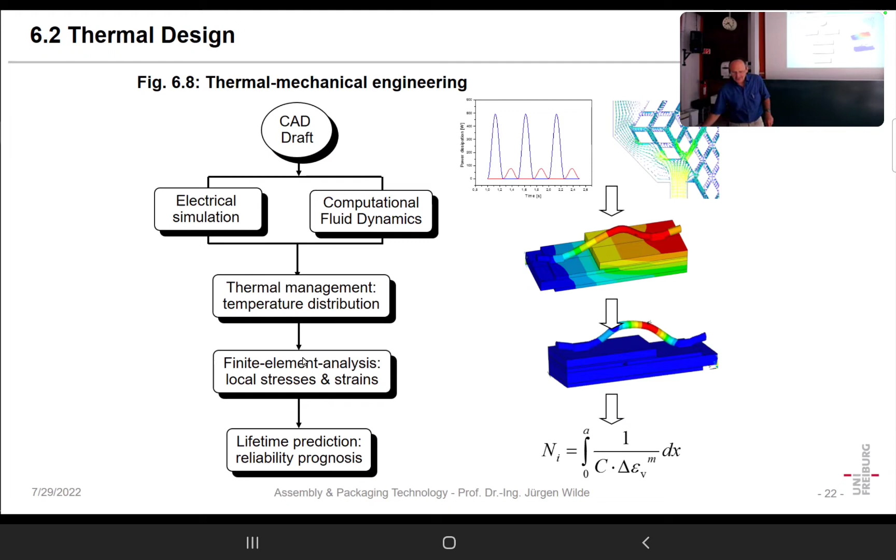Later on, we also developed, let's say, a model for reliability of that thing, but I must say that is not yet finished. We are still doing some research in that field of reliability. Okay, so that's the point.

But in many cases, especially if you do not have so advanced tools like finite element or computational fluid dynamics, you can try with an easier method. One of the methods is just the idea of thermal resistance. Thermal resistance defines how many degrees the temperature rises at the hottest point in a device when you dissipate 1 watt in that device.

And of course, that depends on the design. It also depends on the material. If you have more copper in it or more aluminum nitride or what else, what's the best material with respect to heat dissipation?

Diamond. Diamond can be 5 times better than even silver or copper is. So that's really good. And at the same time, it's an insulator. But of course, making substrates of diamond would be a little too expensive, so diamond is rarely used.

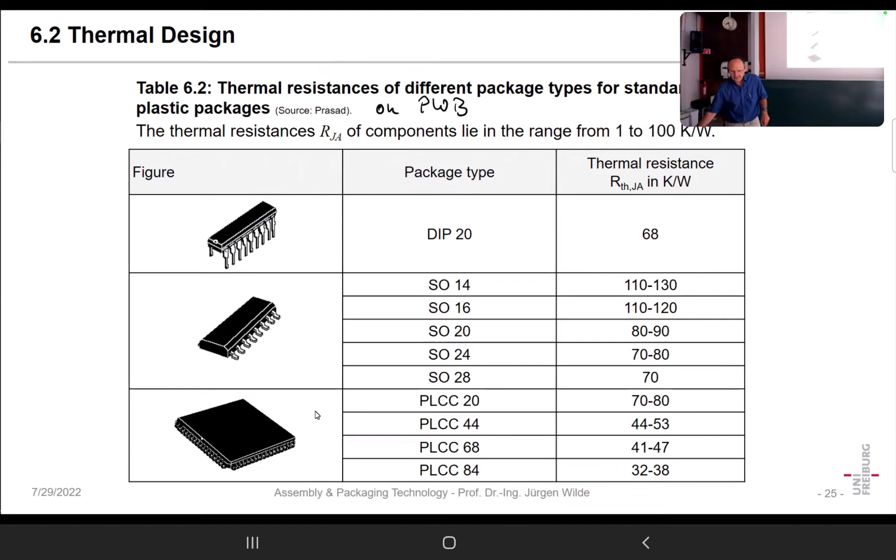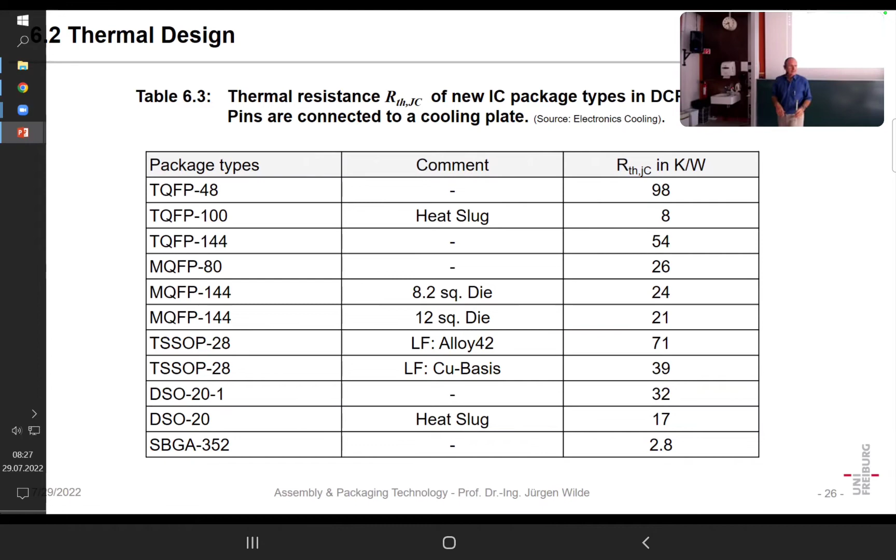In other cases, especially in designs which are made for higher power, and when we want to disregard the effect of the surrounding, then we give RTH junction to case. So that's defining more the thermal resistance inside the package, and not, as in junction to ambient, the overall thermal resistance from inside to environment. Okay, so that is important.

We have also seen from that example that two phenomena are very important for low thermal resistance. One is the material. Of course, the better the thermal conductivity of the material of the housing, the lower the temperature and the lower the thermal resistance will be. On the other hand, if we have air cooling, the faster we blow, the lower will be the temperature and the thermal resistance.

But of course, both resistances, junction to case and case to ambient, are in series. And even if we bring that case to ambient resistance to 0, the junction to case resistance would remain. It's not even that simple - both resistances in reality are not really independent. In fact, we find that when we reduce the case to ambient resistance, then typically the junction to case will increase.

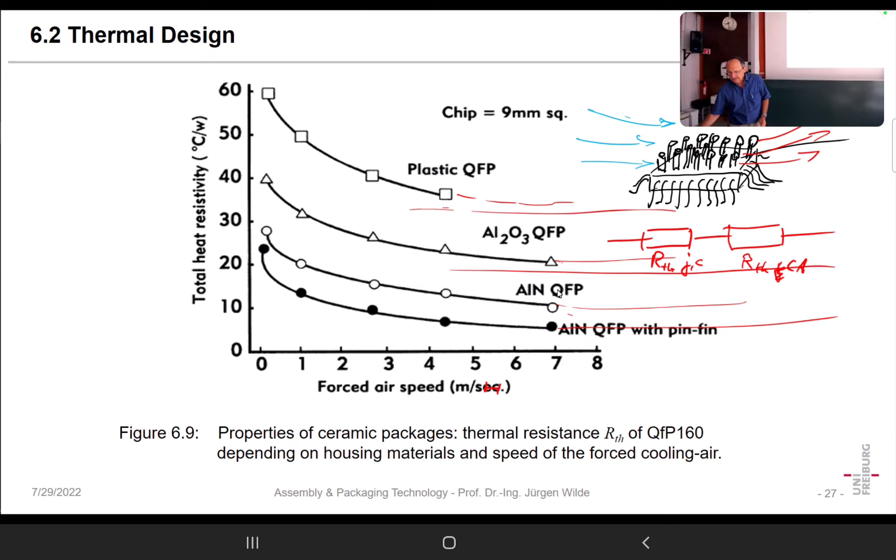Then the question was about heat transfer mechanisms. The first mechanism is just heat conduction. Here we have the so-called Fourier equation, which says the heat flux, which is the power going through a certain area, is proportional to minus the heat conductivity multiplied with the gradient of temperature.

In that way, at least for such a brick-like element, we can compute first of all the heat flow, but later on we also have to compute the thermal resistance. And on the other hand, the heat flow, when we have cooling against the wall, we define a heat transfer coefficient, which is the heat per area and per temperature difference between the medium and the hot material or the hot plate, for instance.

Typical values are between 1 and 10 for free convection of air. Free convection means we do not blow artificially, but it's just... why do we have free convection? What's the reason?

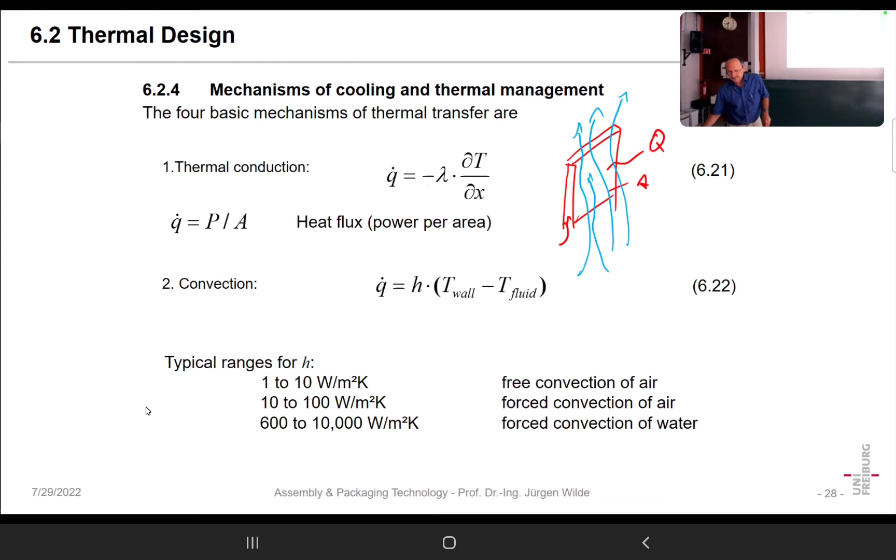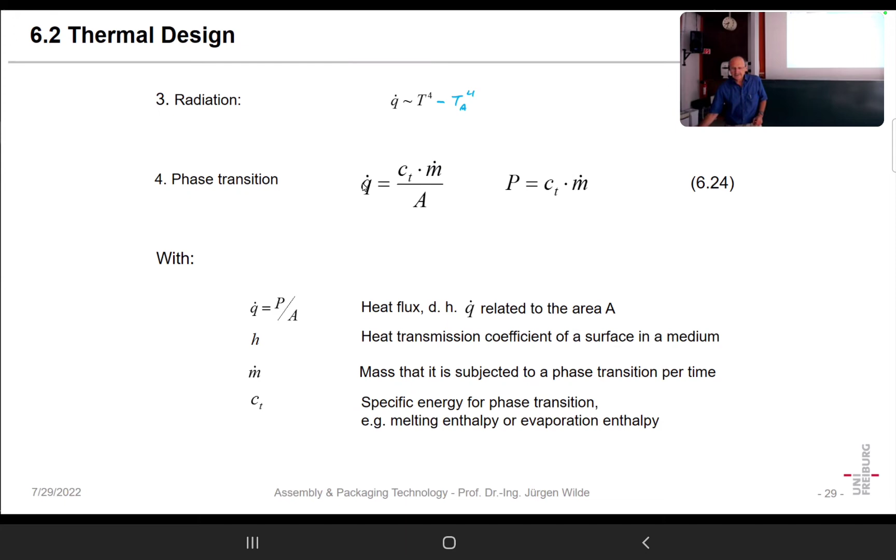Then we have radiation. The heat flux is proportional to the temperature to the power of 4 of the heated part that radiates. But we could say maybe up to 150 degrees centigrade or so, radiation is not really important for cooling - but it is important, we will see it. And then we can have phase transition like boiling, for instance, that is inside a heat pipe.

For thermal conduction, we can say we have derived that if we have such an element, the thermal resistance is proportional to the length in the direction of the heat flow, divided by the area, and divided by the heat conductivity.

And that means, of course, larger areas are better, but one of the severe problems is that heat is always dissipated first in a very small volume, and in that way it must be distributed from a small volume to a large volume. Only when it's in a large volume do we also have a large area from which it flows.

That means to come to a large area, when we have a point source, we also need to have a large distance. And that's the reason why concentrated heat sources are always making problems - because you first have to distribute the heat until you can spread it efficiently. For such point-wise sources or sources in small volumes, you also need materials with high heat conductivity.

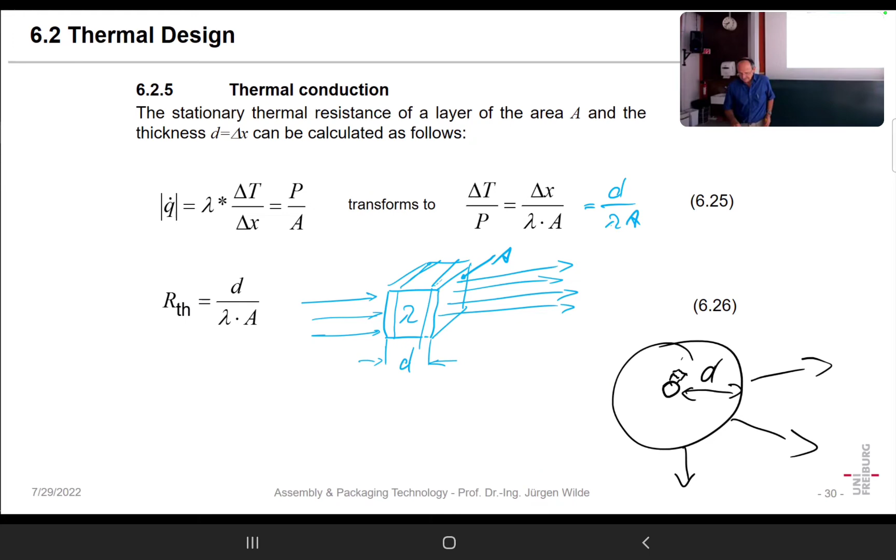We also must keep in mind the temperature conductivity. The heat conductivity is not related to the mass, but it's related to the volume. On the other hand, the Cp, which is the heat capacity of the material, is typically related to the mass. So when we also take into account heat capacity, we also must know the density of that material, meaning how many kilos we have per liter or cubic decimeter of that material.

As I pointed out, we have quite a range. Tin and lead are in the range of 30 to 60, and again here we find a large scatter of the values in literature. A typical value, I would assume also for the exam, is something like 50.

Silver goes to 400, but that is not for sintered silver. Sintered silver is worse because it's not completely sintered, and for that purpose it's lower, somewhere between 200 and 400.

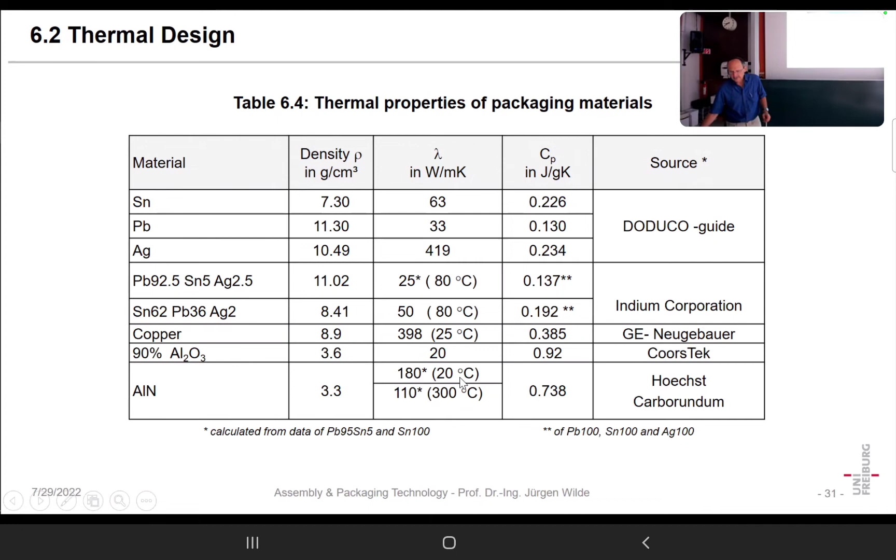Why do we need the Cp, the heat capacitance of the material? Why do we need it? Up to now in that lecture, we didn't have something that had to do with the Cp value, but why would we need it?

Yes, maybe we can say it a little shorter: it's affecting how fast we heat something. If we have a low heat capacitance, we also need little heat to bring it to a certain temperature. If it has a higher heat capacitance, we need more energy.

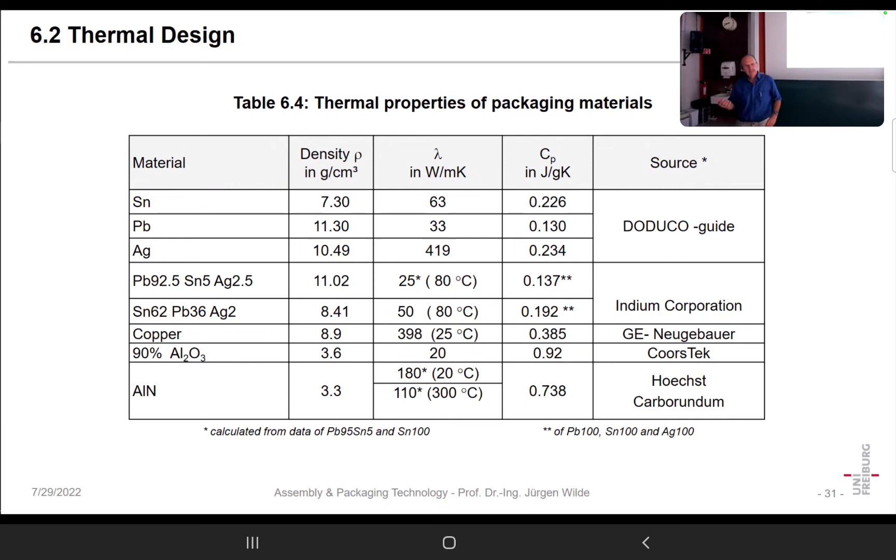The cooling rate and heating rate in temperature transitions depend, first, on the power, and second, on the heat capacitance. And the third thing is, of course, the thermal resistance. So you could say it's similar to an RC element in electrical engineering - we have the thermal resistance and the thermal capacitance to take into account.

When we have thermal networks, the simplest thing is we assume all are in series - junction to case, case to ambient, both in series. As I pointed out, that's a simplification, but it's roughly valid.

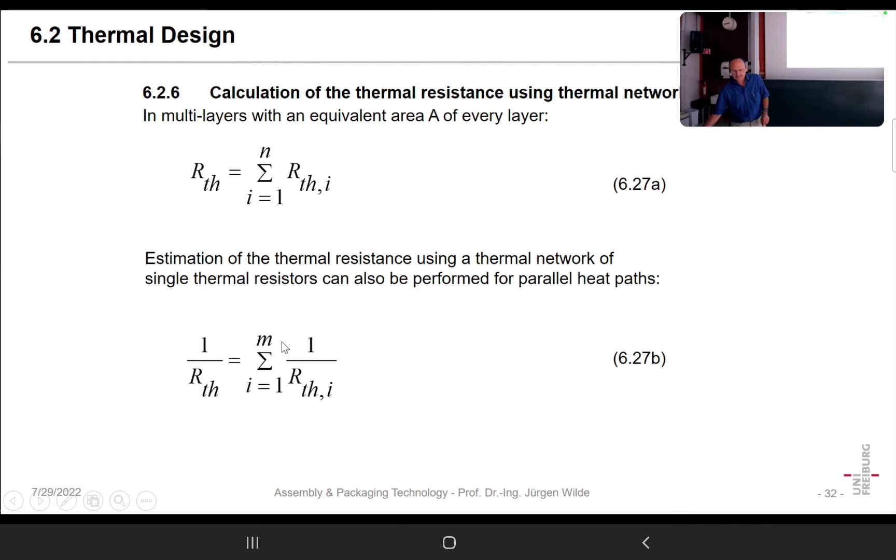On the other hand, we also have cases where we have thermal resistances in parallel. For instance, sometimes we have cooling of the semiconductor in both directions, heat going down and heat going up. In that case, we have resistors in parallel, and it's just the inverse law of parallel resistors, like in electrical engineering.

So here is an example, quite old, I took it from a textbook. The example is a ceramic housing. It has pins here, so it's some kind of pin grid array. In that housing we have something like an HTCC or LTCC, and on that we have the chip in a flip chip mounting, with a cap on top of that.

We do not just want the heat to go through the flip chip and to the bottom, but we also want the heat to come out the top. So normally reasonable people would put a pin fin cooler on top, and because you never know the precise distance from the chip top to that cap, there must be thermal grease. In that image the thermal grease is shown much too thick - so thick it would rather be a heat insulating material, symbolizing that it's not really good, but it's better than having nothing.

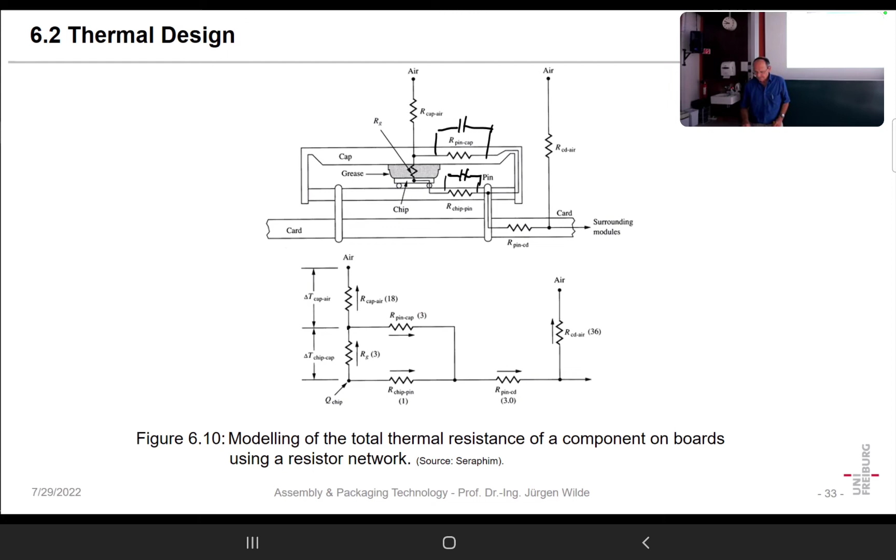As I said, the thermal resistance is estimated. You have the thickness of the layer in the direction of flow, you have the area perpendicular to that, and you have it for that individual layer. In that way you can do it in series, or for the parallel ones.

When you do such a calculation with that formula, that would mean the following: you have a small volume, and from there you come to a larger volume - let's say a small brick and a big brick. But it is clear the heat is not uniformly distributed in the big brick, because it has to spread. So the heat coming in here must spread, and that means, of course, here in the middle it will be hotter than on the corners.

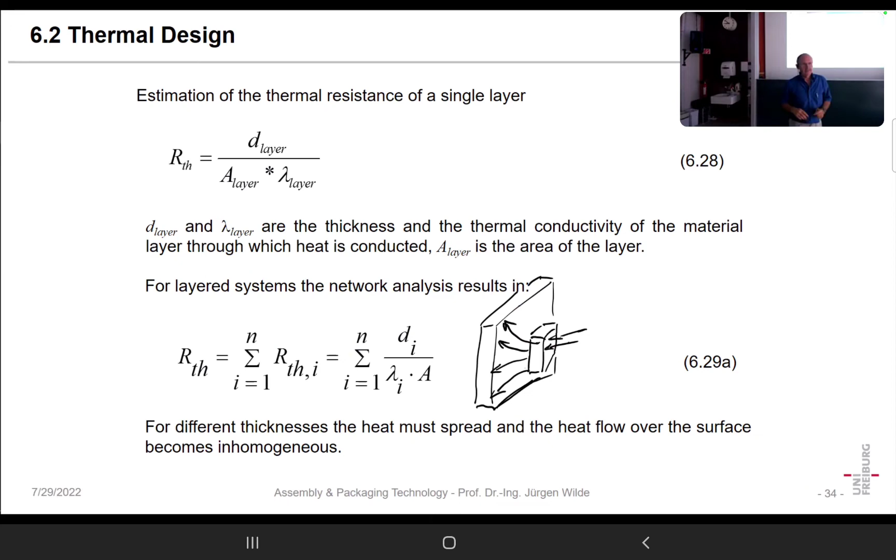In order to account for that heat spreading, we can have some spreading factors which can be used. When you are in the exam, you can disregard these spreading factors - you can just assume the heat would spread ideally. In fact, it doesn't. There was an American engineer named Kennedy who did calculations on how heat spreading works, which can be accomplished quite easily. But nobody does it that way anymore, because nowadays everybody uses finite element, and in that way it's inherently in the simulation.

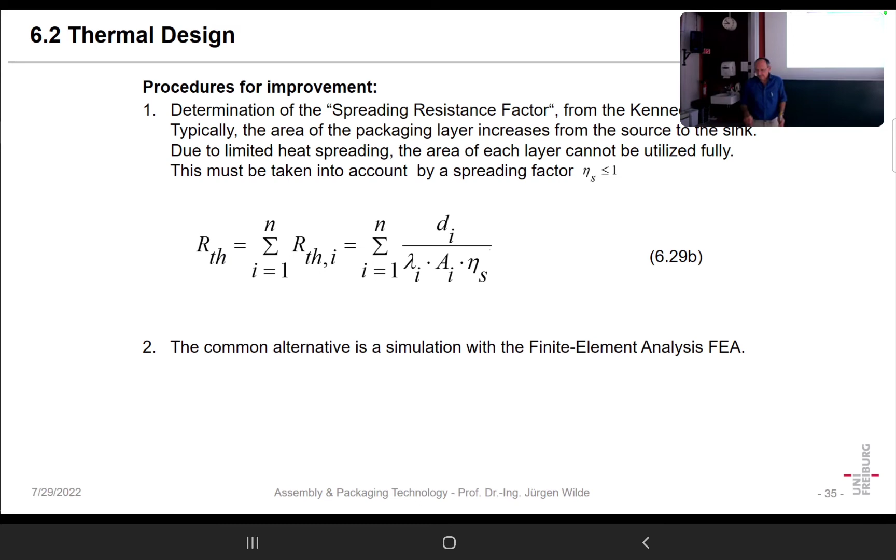As I said, heat transfer with radiation - we have the heat flux, but we can also say the total dissipated power from a body with surface A is proportional to the temperature of that body to the power of 4 minus the temperature of the surrounding to the power of 4. Epsilon is the emission coefficient, a value between 0 and 1. How do we call a body with an emission factor of 1? At the same time, it also has an absorption factor of 1.

Black body, yes, that's correct. And so if we have something like a mirror surface, of course, that has a low emission factor. That could be, for instance, if it's highly polished silver, only 0.01 or 1%. On the other hand, if we have something done black, not glossy black but dull black...

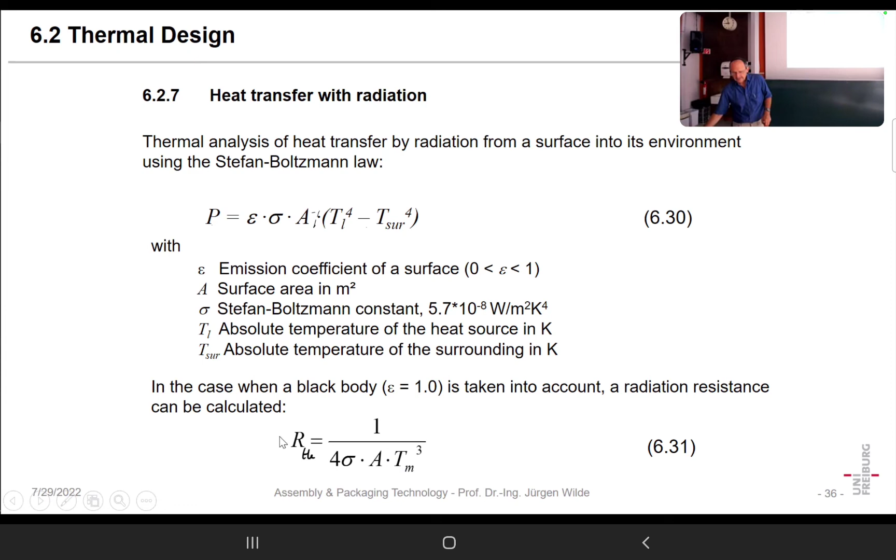The thermal resistance is then 1 divided by 4 sigma, divided by the surface area, and divided by the temperature to the power of 3, in case we have radiation. So for instance, what you could do here is compute the thermal resistance, for instance, of your stove in your kitchen, because you know it has a certain temperature, it has an area, and in that way you can compute that.

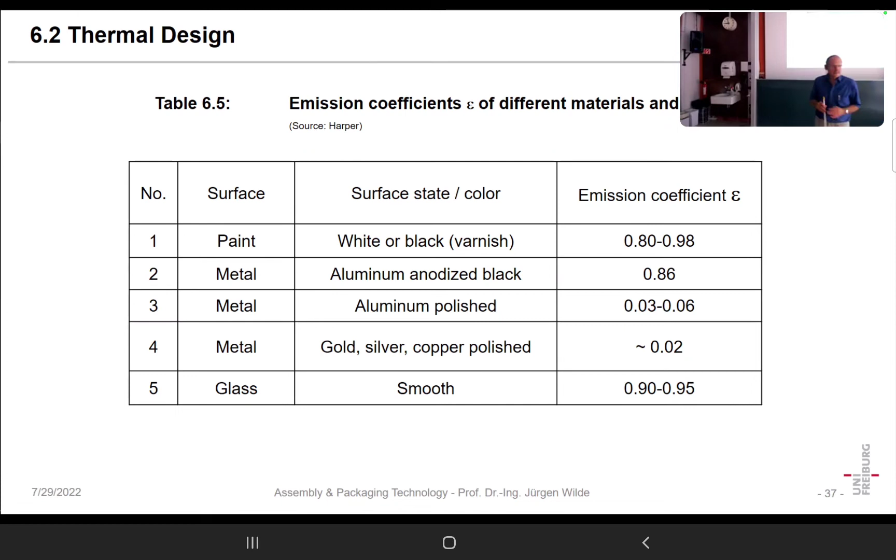And again, that makes calculations quite unprecise. Normally, let's say for cooling, radiation is not so important, but it's important for knowing the temperature in electronics. That is just an example. As you can see here, that's a power device.

That image was already taken quite some time ago, but it's still valid. Here you see the semiconductor has 160 degrees centigrade on the top, while we see almost nothing in the case where it is turned off. Here you see the E, that's the emission coefficient, is assumed to be 0.78. That must be calibrated before. There are several methods. One is to put on a special dark paint.

And that paint has a well-defined emission factor. If you don't have that paint, you have a problem, as on a semiconductor you have different locations, and each location has a different emission factor. And one of the effects is that even if the temperature is uniform, it appears we have hot spots, but in fact that's not hotter, it's just that material has a higher emission coefficient.

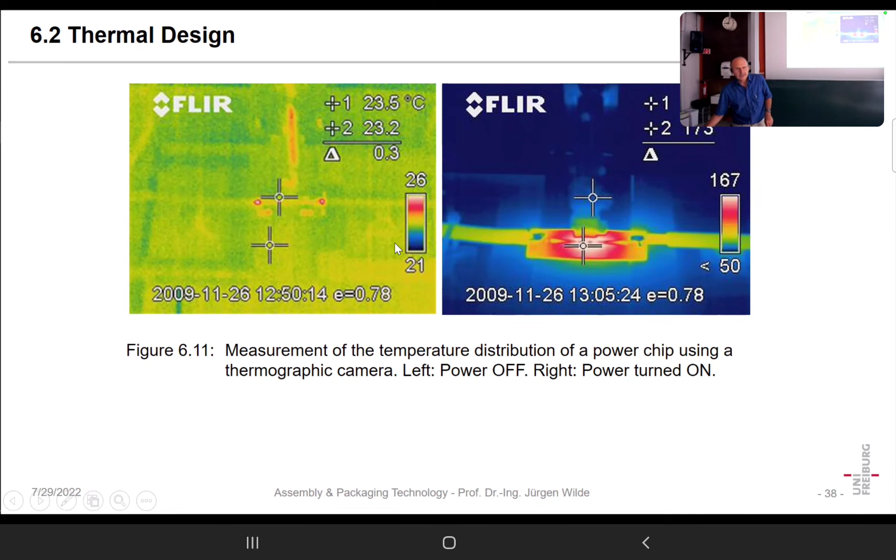One of my PhD students and one of my master students developed that method.

Now a last word about convective cooling. We have already seen some values - typically the surface heat flux we can have, in watts per square meter, and the temperature difference. Taking temperature difference divided by the surface heat flux, the slope here is just the thermal resistance we have. So we can see direct air, natural convection, forced convection, and immersion. Here it was immersion in fluorocarbon. That was done for the first supercomputers - they were just in a certain organic liquid, so there was convection not by air but by that organic liquid. But that was a very expensive solution.

Now, for immersion, we can also use boiling - that's a so-called heat pipe. Some material is boiling, and you can have the maximum heat transfer when you have boiling. That's much better than heat conduction. That's also the reason why we have a steam engine or steam turbine and so on.

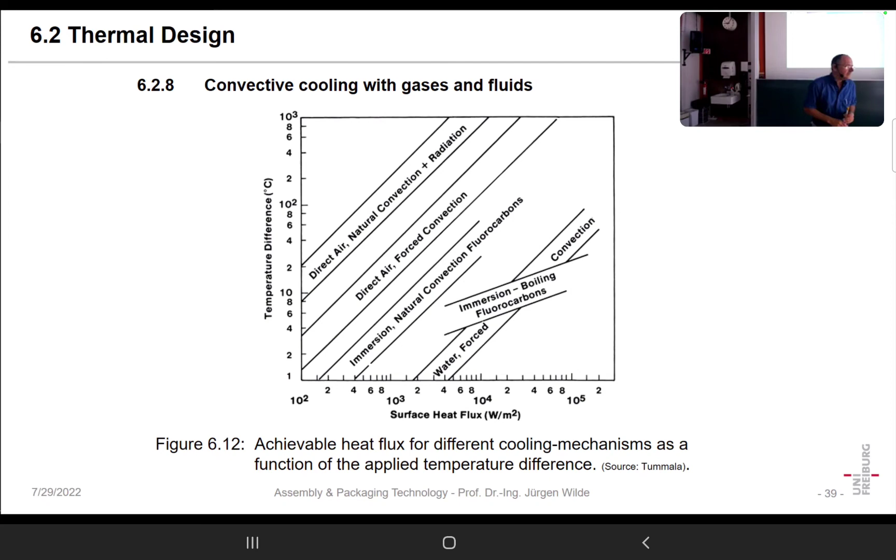Okay, we also had these values. One thing that is also important, because we often need it, is a pressure contact. Here we can see the heat that is transferred is proportional to the area, proportional to the temperature difference over that contact, and proportional to the heat transfer coefficient.

If we bring two surfaces of solids into contact, they do not touch completely, but only at local points where we have that contact, as with my fingers. The result is the heat transfer over that interface is much worse than the heat transfer inside the material.

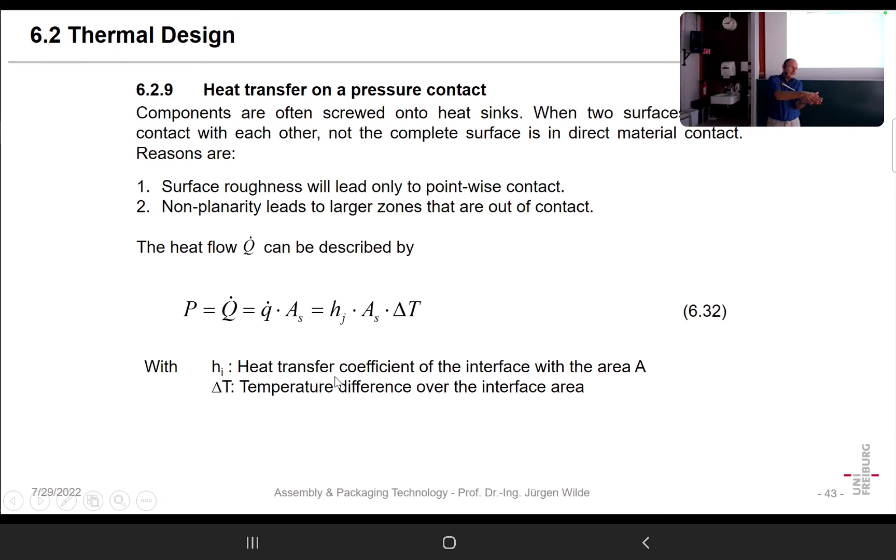If you have your kitchen stove and a pot just starting to boil, you can hear it. When you press the pot, you notice immediately the boiling sound gets stronger. It's interesting - the reason is you immediately have more heat transferred, because the more you press, the higher the heat transfer coefficient will be, since the area you press together is larger.

Again, here we have that heat transfer coefficient. It depends on the surfaces you have and on their quality. It is somewhere between 2000, which is really bad, and up to 100,000. So my idea is if you take such a value, you might assume maybe 10,000 or so as a reasonable value.

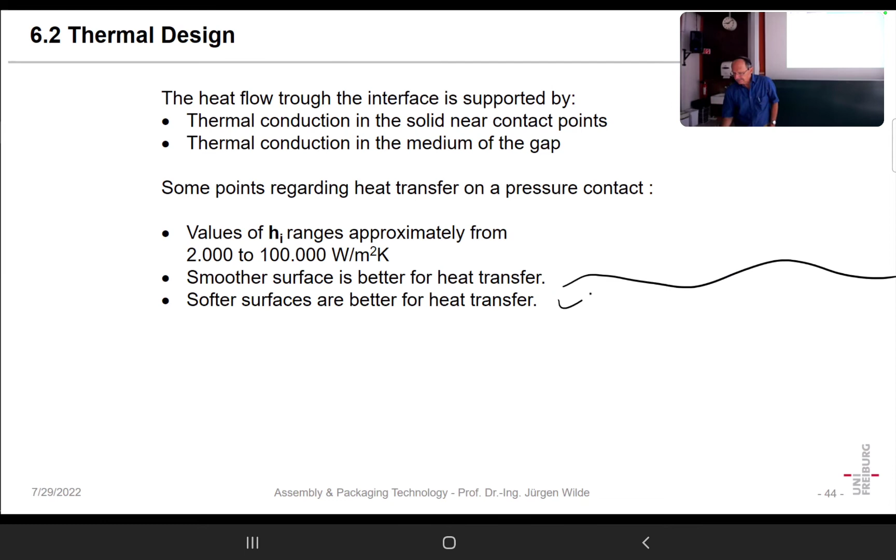When you have no thermal grease - let's say that is the surface you have - then you only have heat transfer in that way. But when you put in a thermal grease, that will also contribute to heat transfer, not only the solid. But that also means when you have a thicker layer of the thermal grease, the result would be more of a thermal insulator. So the trick with the thermal grease is that it should just fill the gap you have anyway, and it should not increase the gap.

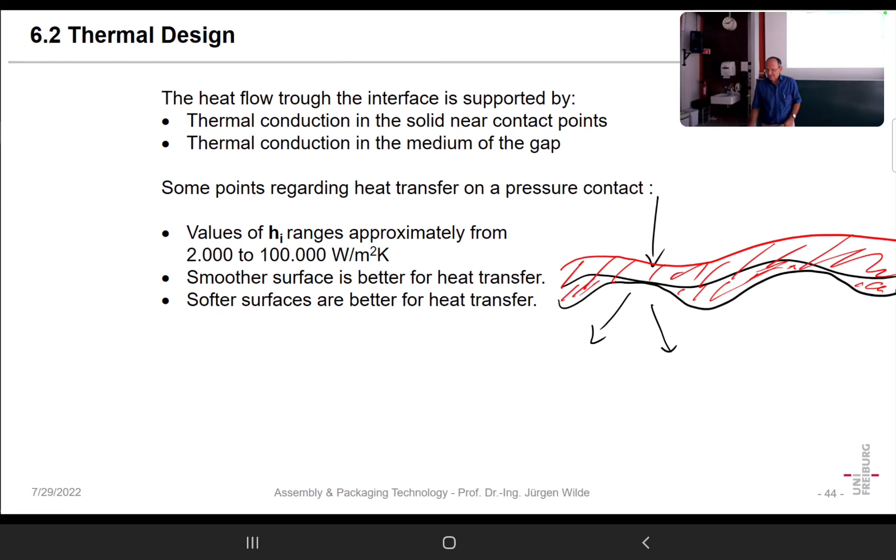Yes, so you can have a certain improvement. I once forgot to put in the thermal grease in my PC processor, and after a very short time, the processor reset itself due to overheating.

Now let's look at the result of heat. And one of the results is thermal expansion.

Generally, the stress is something like the effective Young's modulus times delta alpha times delta T. Yeah, that is a basic formula. If you are in the exam, do not use it because it's too simple.

If you would use it, you would have to use the proper effective Young's modulus, and that is depending on the geometry. For instance, you could have a model that says one over the effective Young's modulus is 1 over E1...

So that's like this formula. You have the delta alpha. The delta T is by the integration over temperature here. And the effective Young's modulus in that two-layer system would be just calculated from the inverse rule of mixtures. That could be an example.

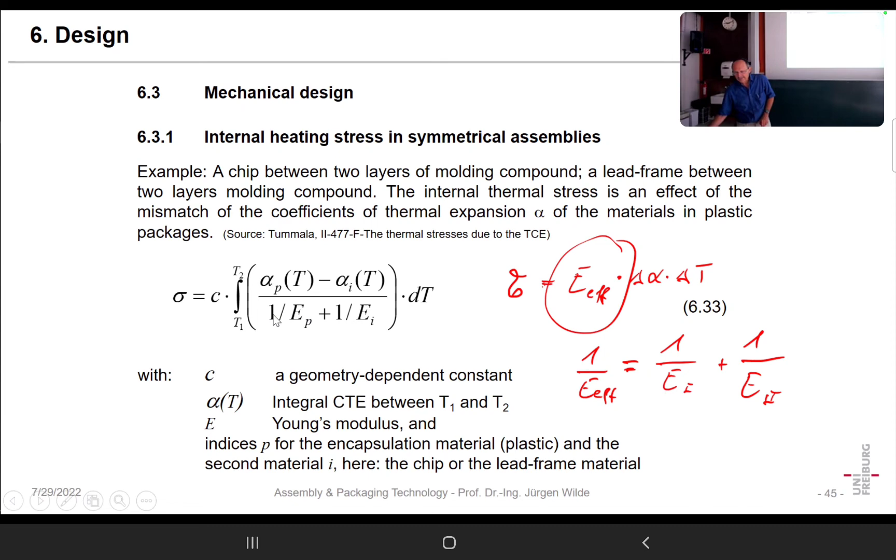Also, we have already derived it in an exercise where the chip is between two layers of molding compound, or where the lead frame is between two layers of molding compound, and then the effective Young's modulus is something like 1 divided by E is 1 divided by E1 plus 1 divided by E2. And in that way, we can get that formula.

So again, we have that formula here. What is important is always from which temperature on do we calculate the stress.

Of course, we could assume that at room temperature, the whole thing would be stress-free. Yeah, it's cold, so it's stress-free, but in most cases, that's not correct. The relevant thing is the stress-free temperature.

In some assembly processes, for instance in gluing, we have a hardening temperature. And then we could assume the hardening temperature is the stress-free temperature. So it's hardening, and the stress develops because we cool it down from the hardening temperature.

If there is a glass transition temperature that is lower than the hardening temperature, then we take the glass transition temperature as the stress-free temperature.

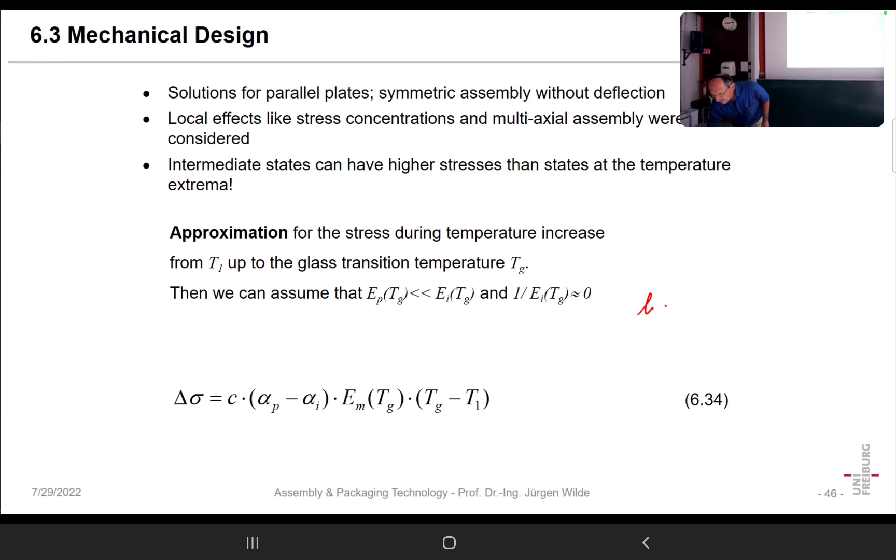So we can take hardening, we can take solidus, or we can take glass transition. And that must be reasonably chosen as the stress-free temperature.

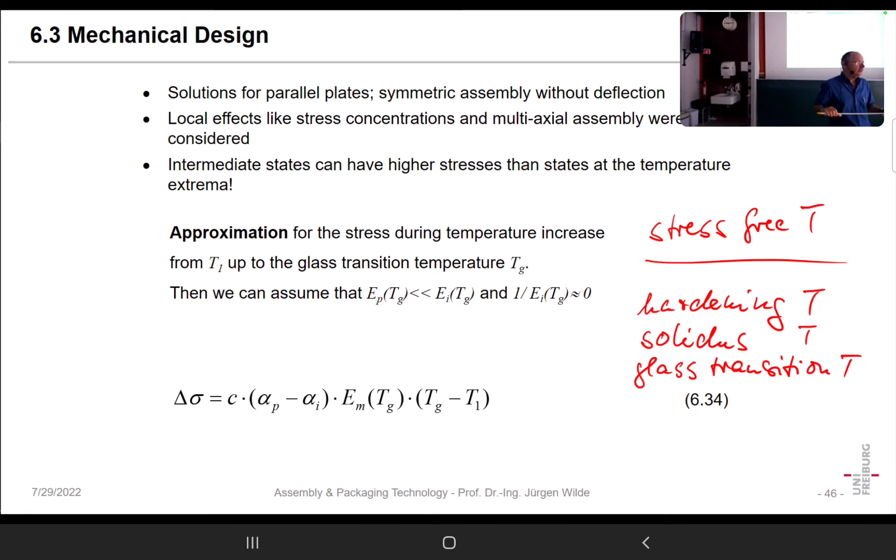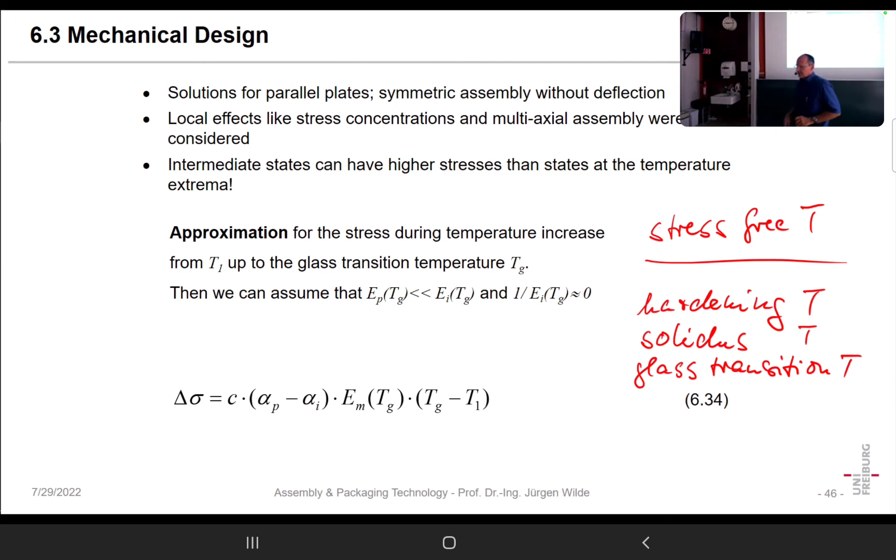One of my PhD students did a very thorough investigation, and we had several effects, and we were playing around with material properties and selecting the right deformation model - is it plasticity, creep, and so on. In the end, the best result he found was after he selected the proper and correct stress-free temperature. So that's really important then.

Another thing that is important when we look at stress phenomena: up to now we have regarded two materials operating against each other, but that's normally not the case. For instance, we have a chip, a solder, a substrate. Solder can also mean adhesive, it can also mean sinter layer or such a thing.

So if we cool down, and both would cool down more or less independently, that is when the solder is really soft, or when the adhesive is soft. Both operate more or less independently.

And so the solder or the adhesive will take up all of the strain difference here. That means the stresses in chip and substrate are not so high, but the deformation in the solder is much. And that means the solder can crack.

On the other hand, if we have a harder solder or we have a sintered layer and more soft substrates or thinner substrates, then the whole thing will be coupled very strongly, and in that way it has a bimetal effect. The strongest effect, of course, would be if there would be no solder material at all, if it would be directly coupled. And in that way, these are the two relevant cases.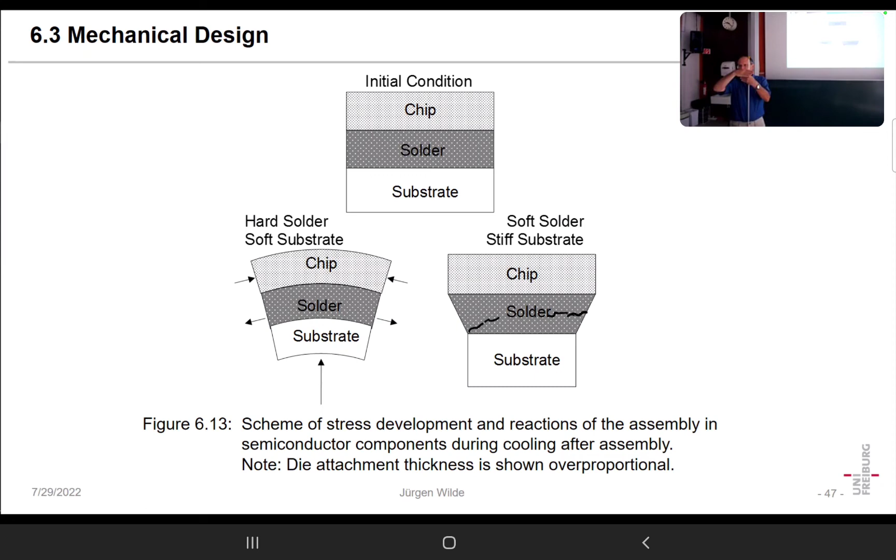Because shear strain is just defined by displacement divided by the thickness of the sheared layer, in that way we could say the thickness of the die attachment material has an effect.

And there is one formula I found in literature that is maybe not the most precise formula, but it describes the situation very well. You could say the stress in the chip is something like proportional to delta alpha, proportional to delta T, and proportional to the effective Young's modulus.

And that is the Young's modulus of the substrate - that is, of the mounting material. You could also say the die attachment. The length is the length of the chip, and X is the thickness of that layer.

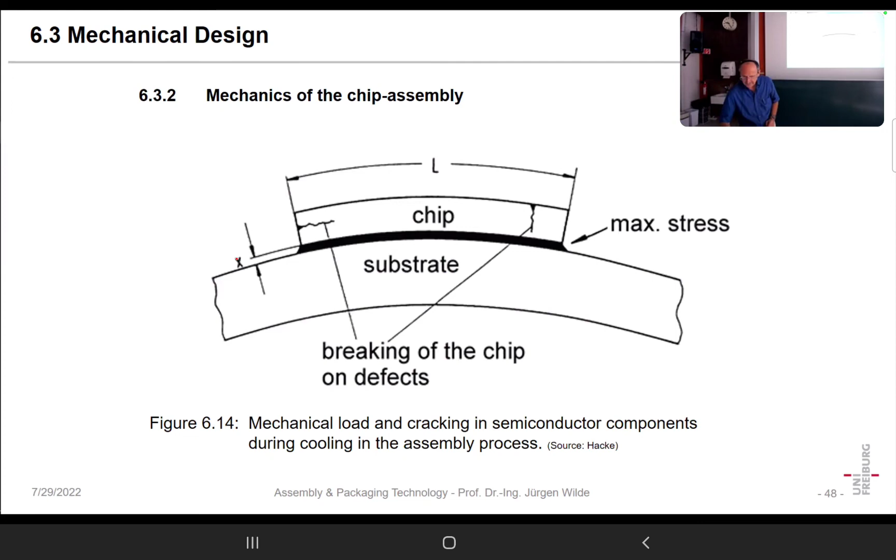According to that formula, you can say that when the chip is larger, you also must make a larger thickness of the die attachment. We have seen that in the example of the silver glass die attachment.

And there is a geometry factor. Normally we take 1 for that factor, only for hard ceramic materials - for instance, mounting on aluminum nitride or mounting on alumina, and having a hard die attachment system like solder. Then we can take a value of 0.1.

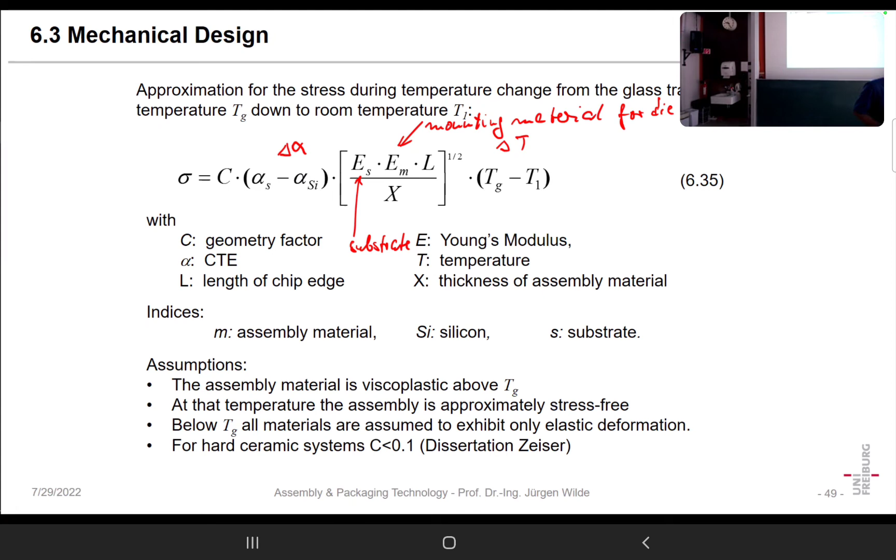Also, again, that's not so precise, but in the end, this formula is important because it shows us what the most important factors for stress development are. It's not the most precise formula, but for learning and for seeing what the effects are, it's very efficient. So therefore, I like it very much.

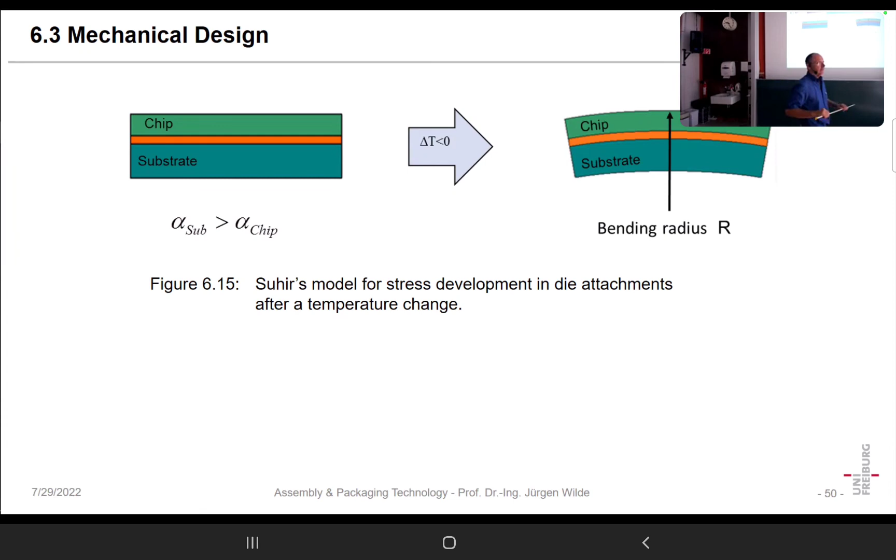There was another guy, his name was Suhir. He did it analytically - I will not go into the details. He could do it for a multi-layer system where you can compute it much more precisely. You get a recursive set of formulas to compute that. For people interested in such topics, you can have a look at that.

But the most interesting thing is, again, you see delta alpha, delta T, and some factor, and all of that factor is nothing but the effective Young's modulus in that system. Of course, when you look at the individual layers, you can also compute the stress - you have to take into account an individual effective Young's modulus for that layer. But in the end, E effective times delta alpha times delta T is always correct, or you take the integral form if the properties are temperature dependent. And the art is just to find out what the effective Young's modulus is.

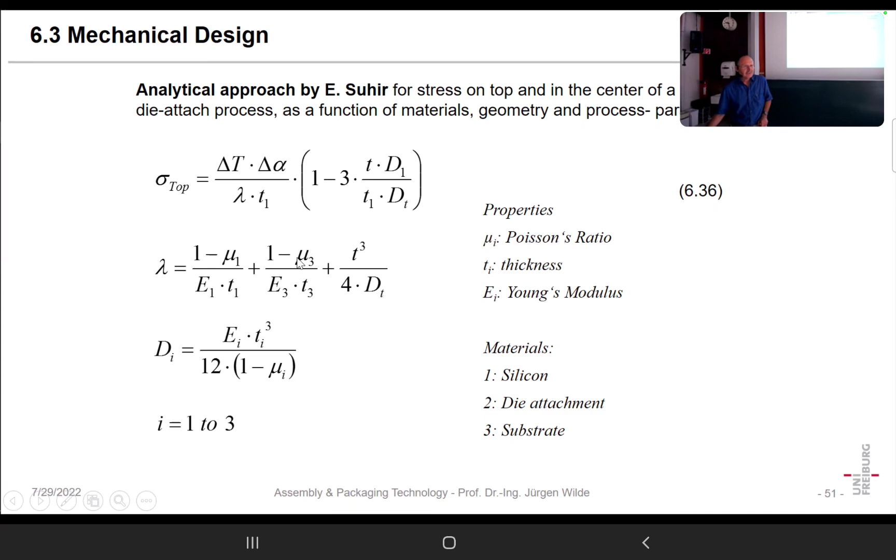That is to determine stresses. The second problem is to determine what happens to the solder or die attach material. So that is a much more complex question.

There are other cases, for instance, when we have shear on the outside, but also pull, which is even worse. What is also important is to know which of the solder joints will fail.

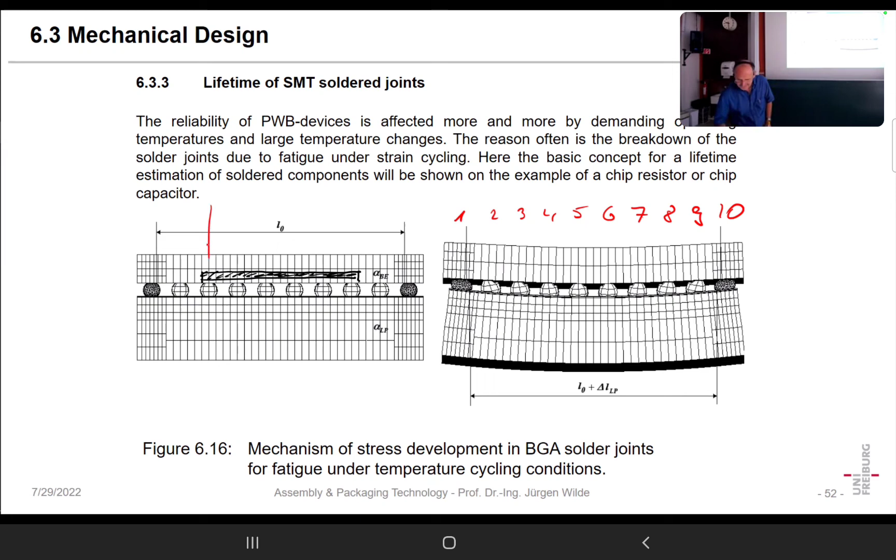Which one would you expect will fail? So the left is 1, 2, 3, 4, 5, 6, 7, 8, 9, 10. Which one will fail? 1 or 10? Yes, 3 and 8 are also in danger, because here the behavior of that BGA is completely different.

We know from many experimental investigations that the corner balls will fail first. So that's the reason, when you have 354 balls, never use the corner balls. You always have sufficient I/Os, so you don't use these because they will fail earlier than others. What will also fail are these 3 and 8. Unfortunately, they are close to the chip, so normally we like to use them in a design.

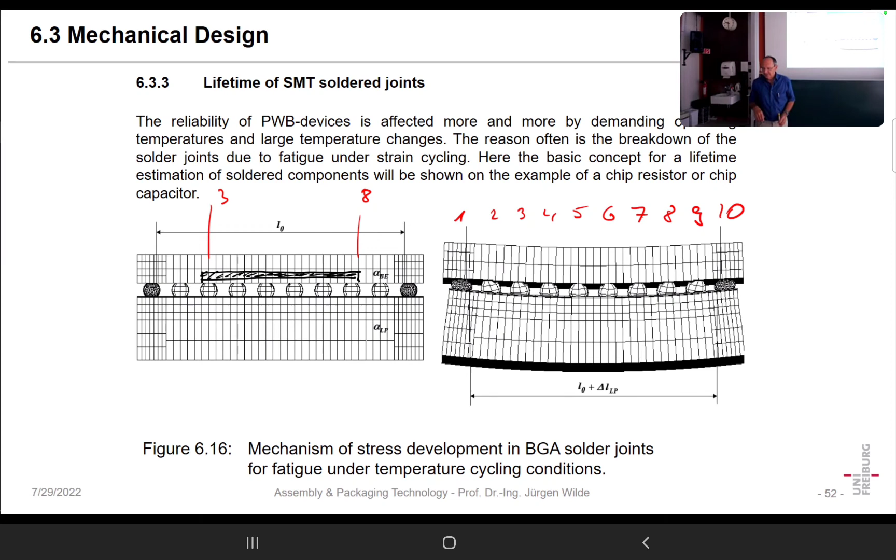But in the end, the question is, how can we predict the behavior of such a solder joint to fail? Here, that was another PhD work in my lab, by Mr. Pustan, and together with Mr. Zhang, he did his master thesis on that topic.

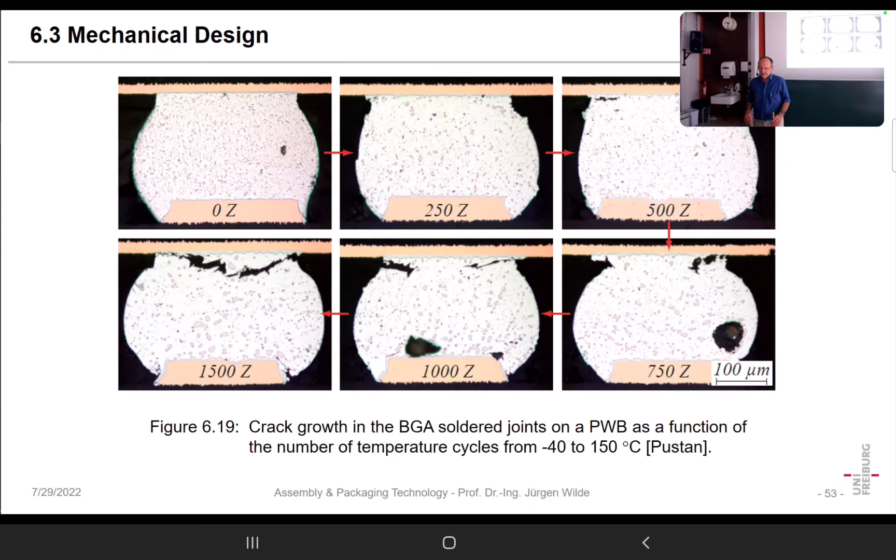What is also interesting is to know the material itself also changes. Between 500 and 750 cycles, we see the structure becomes much more coarse compared to the initial structure. That is something that, if you have engineered parts from mechanics, they will never change their internal structure. They stay as they are, but solder joints don't.

So now let's make a simple model, to finish for today. Imagine we have, to make it easier, just a chip resistor that is, for instance, alumina, or for example barium titanate in a capacitor.

On the side here we have the solder joint, and we have a length, and that length defines not the length of the device, but decides the distance from the outermost solder joints. So when the whole thing expands, we have for the device a CTE, and we have for the substrate a CTE, and for the component a CTE, and both expand.

Of course, the expansion, delta L, is proportional to the CTE, proportional to the delta T, and proportional to the initial length we regard, and that is both for the substrate and for the component. The difference in length is the length change, which leads to stresses, because when both expand in the same manner, there will be no stress. Moving like this will not lead to stress in between, but moving like this will lead to a displacement and a stress.

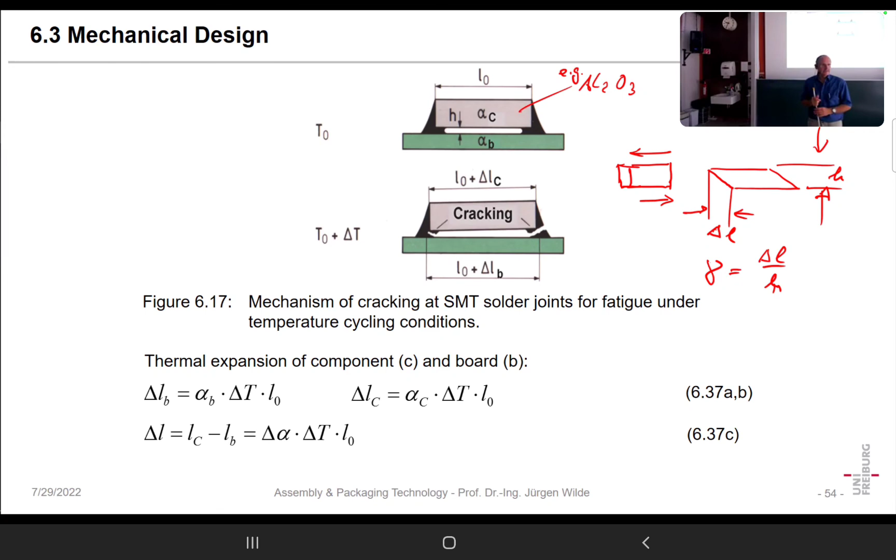Okay, we can have that because it is a symmetric problem. We divide the strain by 2, so the delta L is distributed to both sides. And so we can say the shear strain is delta alpha delta T times the initial length divided by twice the height of that.

If it's square components, then of course in square components, and we have joints here, then if that is the L, that is L times square root of 2, and then we have to multiply it with that factor. Okay, that's a shear strain.

Normally, in isotropic materials, we can convert shear strains to normal strains or normal strains to shear strains. That is important because material properties normally are measured by tensile tests. In a tensile test, you have normal stress and normal strain. Stress is force divided by cross-sectional area. Strain is length change divided by length. So normal stress is normal strain, but here in that problem we have shear stresses and shear strain.

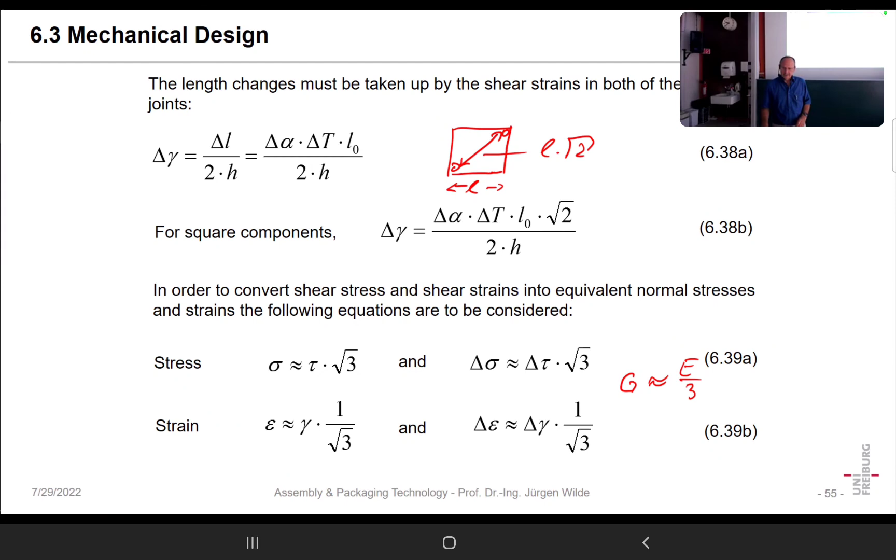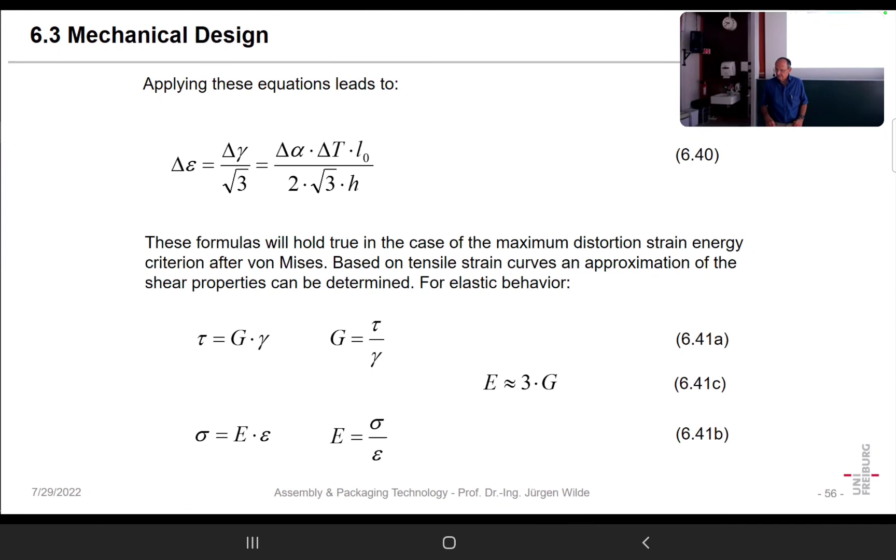So in that way, we can take into account the relevant stresses and strains, which are shear stress and strain, and compare them to normal stresses and strains. Okay, I already had that. Of course, it's also important: the shear stress is shear modulus times shear strain. Normal stress is Young's modulus times elastic strain. Okay, same here.

Okay. What happens under much strain? That's an example. Again, Mr. Fix did his dissertation in Bosch under my supervision. And that's how a chip resistor looks after 1,500 cycles, minus 40 to 125 degrees centigrade. So it looks not so reliable anymore.

And having a cross section, we can see there are many cracks, there are holes, especially here under the chip where there is a small gap, a small height. We have a large shear strain. We have only cracks here, we can see. And also the structure changes significantly.

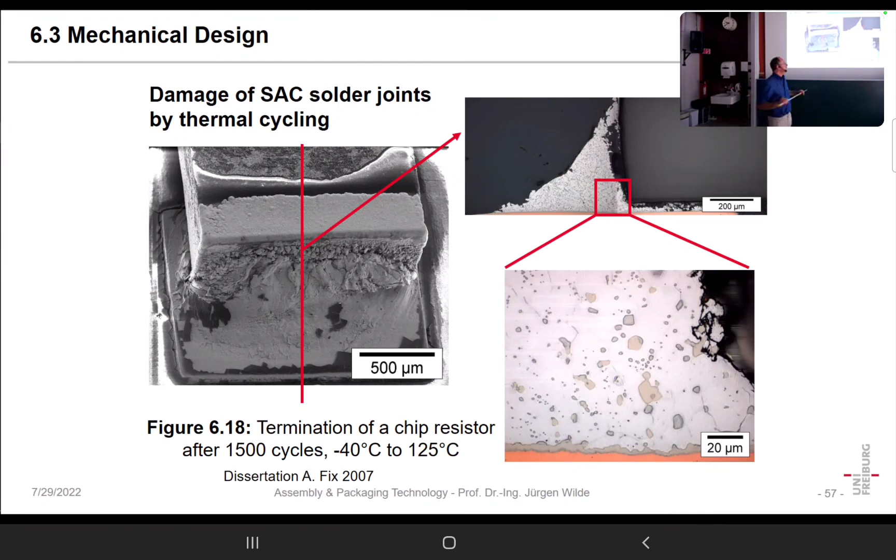Okay, but how can we predict here what happens? And to that purpose, there is a relationship which is really important, and that is the dependency between the delta epsilon. Epsilon is the strain range, and the number of cycles to failure. And when we have two cases, one is what will fail first, and you can say that depends on the deformation mode, and that can be elastic, and that can be plastic.

And you can see here, these are the two boundary curves. So that's the elastic range, and that's the plastic range. Unfortunately, it was written here, but that just means it's that curve here. So that's the plastic failure range, and that's the elastic failure range. Unfortunately, as we have seen, we have these cracks at 1000 cycles. It is that range here that is relevant for solder joints.

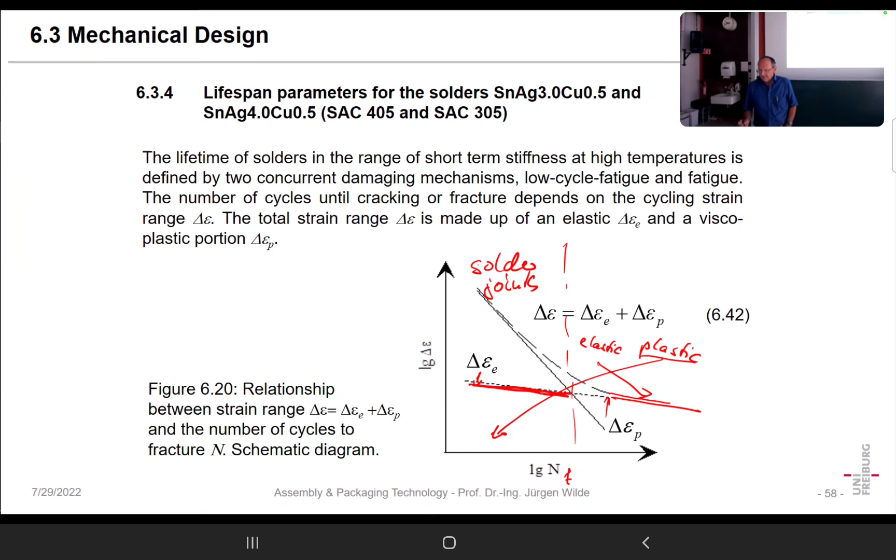And in that way, only this curve here is regarded, which is making the dependency between plastic strain and number of cycles to failure. And that can be modeled in a power law. And that says the number of cycles to failure is proportional to the strain range, to the plastic strain range, to the power of C2. But C2 is typically smaller than -1. So that could be -1 or -2, for instance.

And that means when the strain range becomes larger, the number of cycles becomes lower. Again, that's what we already know. More strain is bad because we have more stress and strain, and more stress and strain means lower lifetime. Okay, that is the famous Manson-Coffin or Coffin-Manson law, and that is defining so-called low cycle fatigue.

And now the trick is the following. We assume the strain we have calculated for that chip resistor. We put in the strain we have calculated.

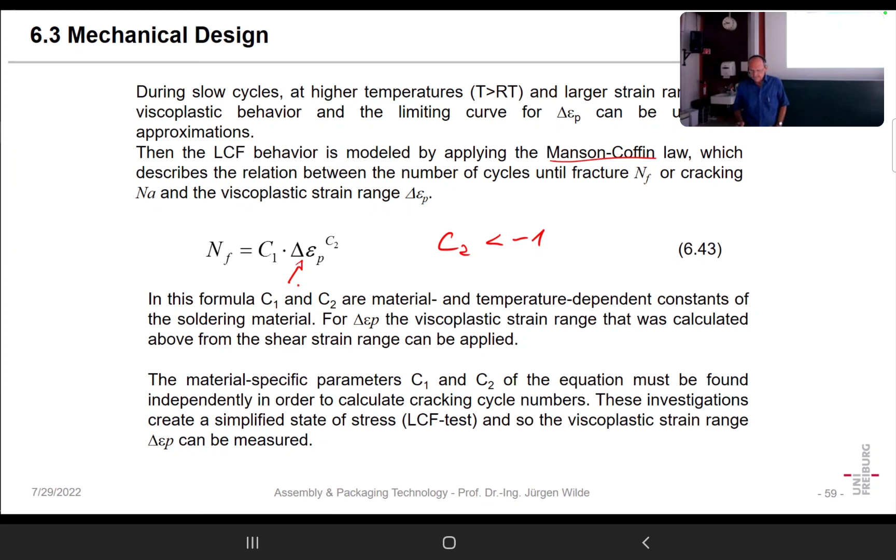Now taking that formula, we can put into our law this strain which we have derived. As we have seen, delta epsilon is delta gamma divided by square root of 3. And that is delta alpha, delta t times the length divided by 2, divided by square root of 3, and divided by h. Possibly also multiplied with square root of 2 if it's quadratic.

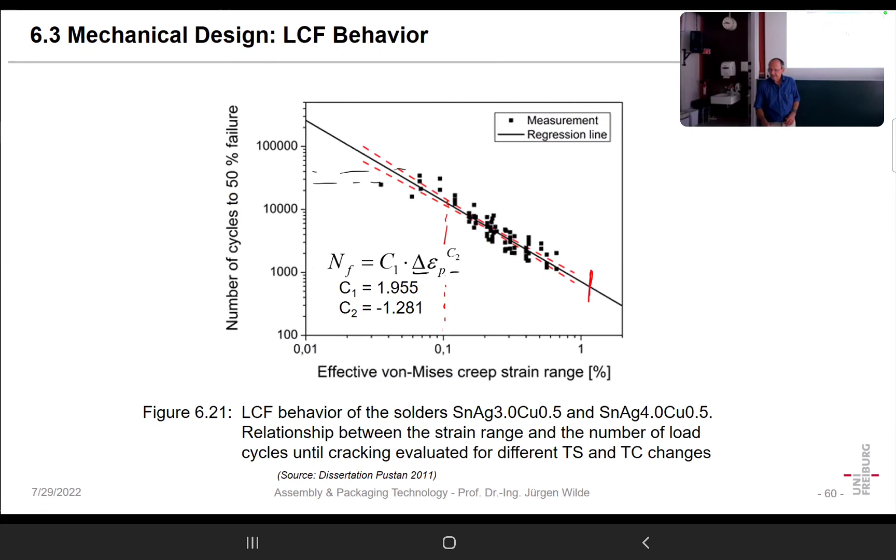In that way, we get a complete formula, and that formula can be used for calculation of the lifetime. Again, here we can say C1 is roughly 2, C2 is roughly minus 1.3. In that way, we can calculate how many cycles it will be until our device fails by fatigue, or low cycle fatigue, of the solder joint.

Okay, that's the basic relation. Also, please keep in mind that what I showed here is prepared in a way to make it evident and to show what the real dependencies are. If later on in professional life you have such a problem, you should not use my formulas here. They are only estimates, but do a more precise calculation based on, especially based on own measured data. That's important. But for the basic understanding of what happens in the low cycle fatigue of solder joints, it's a very good approach. So again, we see from these formulas what are the most relevant factors we have to influence.